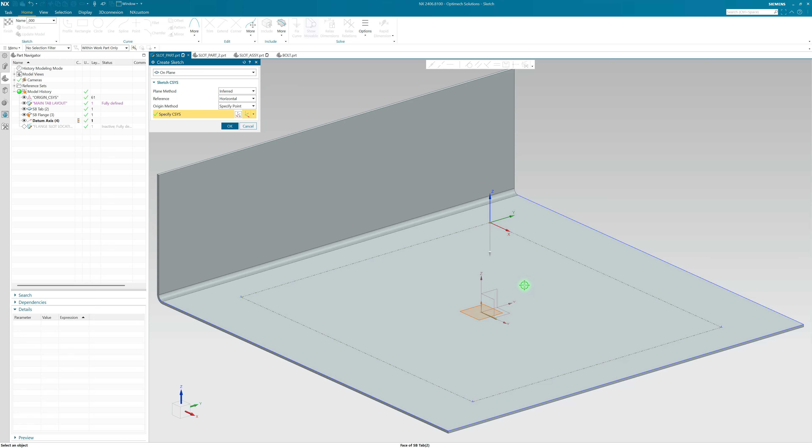And notice NX infers the plane of this coordinate system as our plane, and then the axis of this coordinate system as our axis. Usually that's what you want, but in this case, I'm going to switch the plane to the face of this. That'll just help us with copying and pasting later, and I'll OK there.

If we square up to our sketch, we'll add in a slot. I'm going to keep that length and that width. Drop it in here. And then we'll just grab the midpoint, drag it over to the origin of the sketch. And now we're fully defined. And we'll just finish that sketch. Get back to trimetric.

And so since this is sheet metal, we could use normal cutout. But because we may want to reuse this slot in other places, I'm going to actually do the extrude. And I'm going to select the entire slot sketch. We'll reverse direction and do through all. And middle mouse to OK. So there's our slot. Now we need it at the other locations.

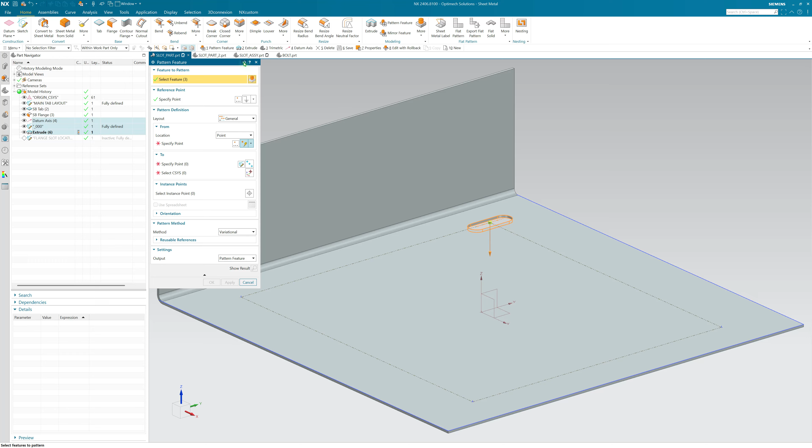So I'll highlight these three features, the axis, the sketch, and the extrude, and do pattern feature. And I'm going to reset here. So if we were coming in from scratch, I would switch this layout to general. And I guess it deselected my features. So I'm just going to come over here, hold control, and get those three.

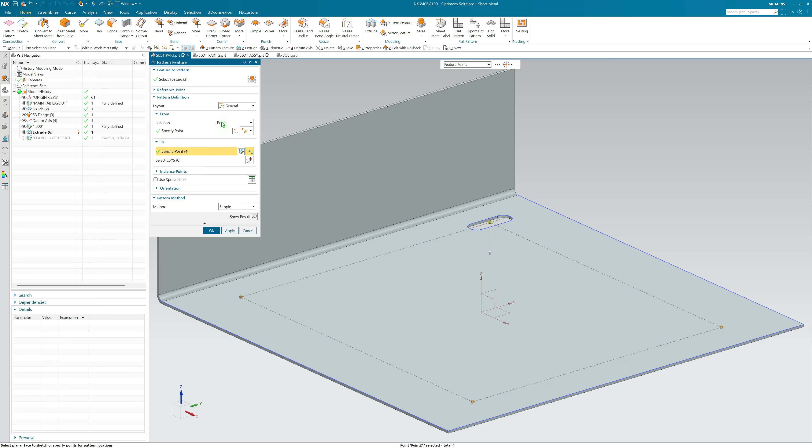So now we'll select our from point. So it's going to be that same point we created the initial slot on. So I'll use a quick pick menu and select that point. And then for the to point, if we're set to feature points, we can select the entire sketch here, or it's often easier just to select the entire sketch in the part navigator, and that'll get all 4 of those points.

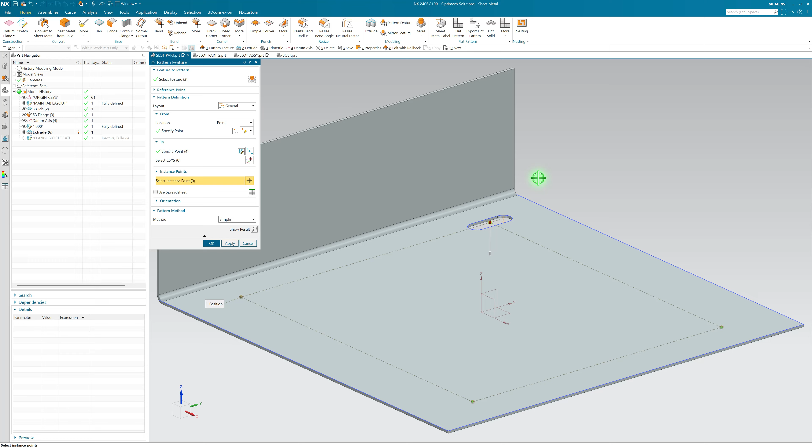But in this case, it's saying there's 4 points. Well, we already have one slot created, so we don't need that 4th. It's trying to create a slot over top of a slot that's already there. So if we quick pick menu over this and select the instance point, then we can right click and say delete. So that way the pattern won't create a slot at that location. And I'm actually going to do variational. It depends on what you're doing, but do variational.

So now we have those 4 slots, and we may want to add this to a feature group. So I'm just going to call this slots with caps because I'm OCD. So now let's say we have this flange here and we have this sketch. We want slots at these 3 points. What we can do is just copy and paste this slots feature group. So Control C, Control V.

So depending on the datum references choice, if we say specify datum references, there's a few more selections there. But if we just select parents, it's kind of like keeping the same types of selections. So there's less to choose from there. So the first thing it's asking for is our point for that slot location. So I'm going to select that point.

Then the face, or this is for the datum axis. So we selected the point for the datum axis, and now we're selecting the face for the datum axis. And now for the sketch, if we look down here, it's looking for the x-axis of the sketch. So in this case, we want our x-axis to go this way.

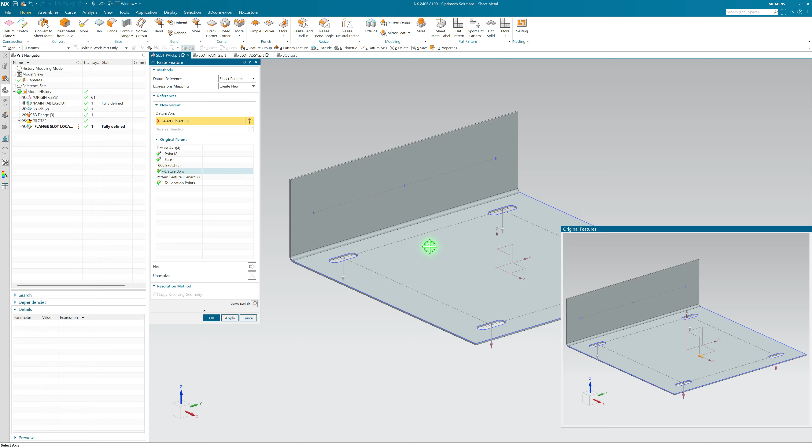That means the slots will be going up and down because the slots go in the Y direction. And then for the To Location Points, again, if we're using feature points, we'll just select this entire sketch, or we can select the sketch over here. And now if we click OK, we have slots in all those locations.

So even though it took a while to create this initial slot feature group, it can be copied and pasted pretty easily. So just to give another example of that, I'll Control C that feature group, and I'll go over to the second part, and we'll kind of do the same thing, just a little bit quicker. So I'll make this bigger. So datum axis, we're going to select a point, and then middle mouse, a face, and then we want the axis for the X direction.

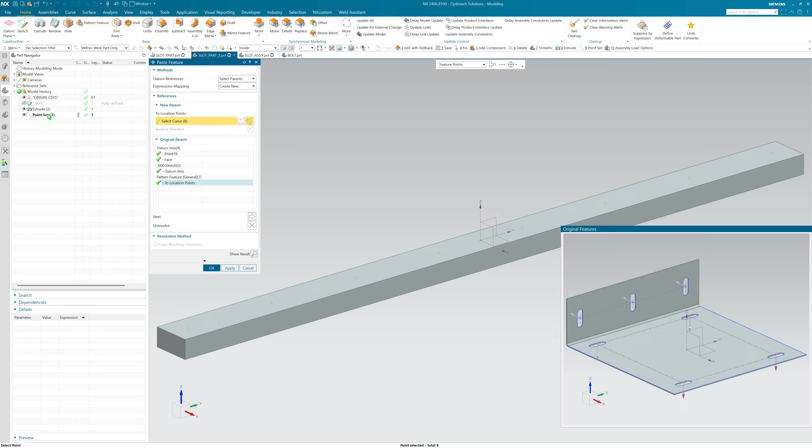So in this case, let's say we want our slots going lengthwise. X will be that way. And then for location, I'll just select this point set here and say OK. So now we got slots in that part really quickly as well. And obviously we can adjust the size of the slots to whatever we need it to be.

And then if we come over to our assembly, it pays off there as well. So temporarily we're going to set the reference set for these two parts to entire part. And then we'll do add component and we'll add some bolts in here. So there's the bolt. I'm going to add 3, so basically 1 for each set of slots we have. And then I'm going to say OK.

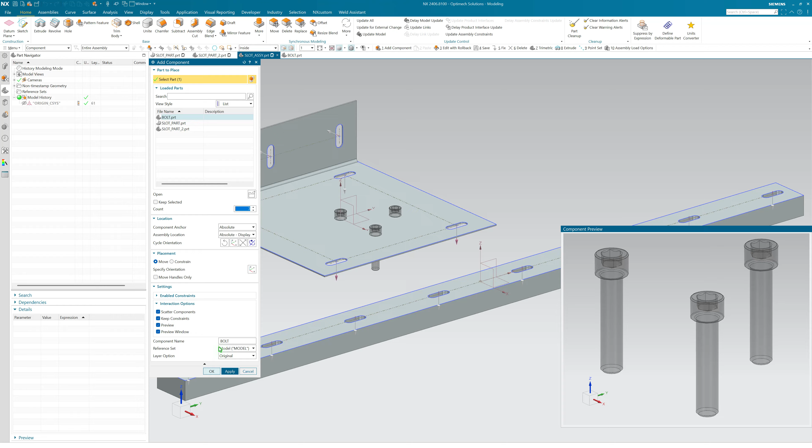And if you drag that down a little bit, we see it's asking for an axis and then a face. So axis, face, and this is remembered constraints, if you're not familiar with it, and then axis, face, and then say OK. So there's our initial bolts, and we can reset these to model reference set now to not see all that extra stuff. And so if we select this bolt, we can do a pattern component, and we'll do reference.

So all we need to do is select this pattern, and then the base handle, we'll select the initial position we added it to. And in this case, we want to make sure we choose the 0 location. So if you notice, if I do the quick pick menu over here, you can see there's 2 options, but we want to choose the 0. That's the initial instance. So we'll select that, and it goes there.

So we'll just do that a couple more times, a little bit faster now. We'll select the pattern, then we'll select the base instance, and make sure to get the 0, OK, and then one last time, we'll select that bolt, pattern it, select the pattern, and then the base instance handle, and OK. So really quickly, we've got all our bolts in place in the assembly, or our washers, whatever we're adding there.

And then another nice thing is it's pretty easy to add more slots if we need. So in this case, I'll just edit this sketch. We'll add a point here at the midpoint of this, and add one here as well at the midpoint. So that sketch is fully defined. We'll finish that, and notice the slots are added there.

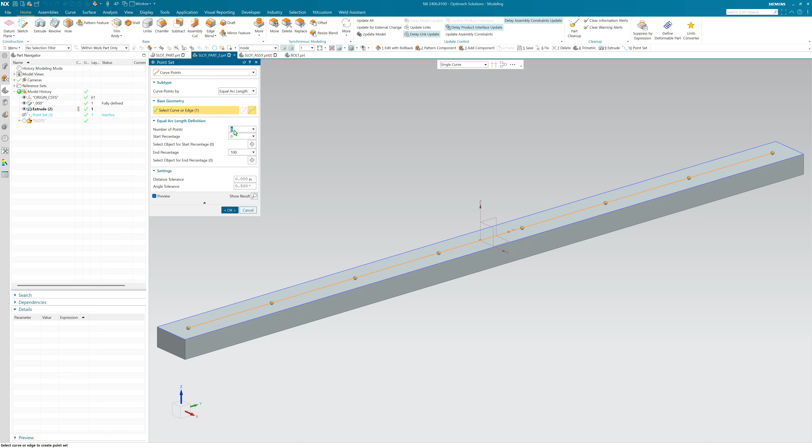And then if we go over to part 2, I'm going to edit this point set, and instead of 8 slots, we're going to do 10. So now there's going to be 10 slots, or let's just do 12 to make it really obvious. So now there's 12 slots in that part. And if we switch back to our assembly, notice we have all our new bolts as well. So since we did a reference pattern, those bolts will be added in automatically.

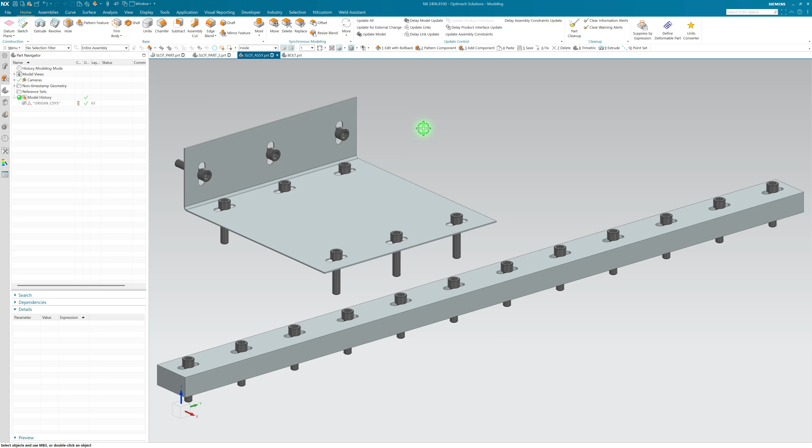So that's a way to do slots that's kind of flexible, and it's also easy to reuse, and then helps with adding fasteners at the assembly level. And then if you wanted to, you could probably create a feature template out of something similar to this, so that instead of creating it for the first time each time, you could just use a feature template and kind of do the same thing. But once you have the initial slot feature group created, it's easy enough to copy and paste.